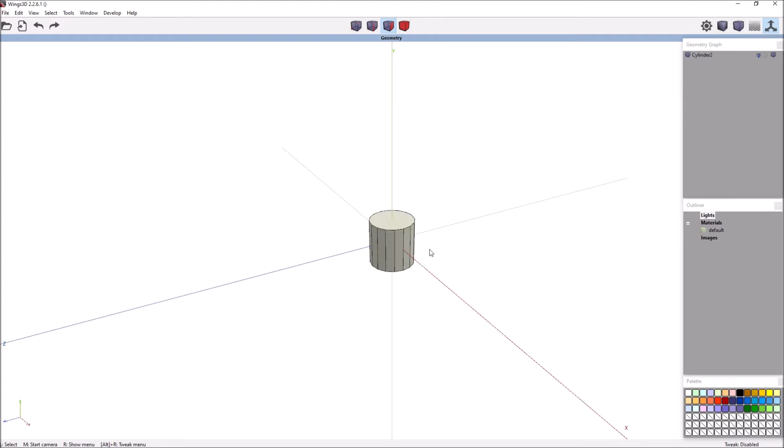Start with a nice cylinder. Let's have a look here at what we've got, and scale that down there. Let's scale the top—we're going to sort this bottom out after. I just want the initial shape to start with. So I want to come in further than that, don't I? Like so. And then I'm going to extrude that.

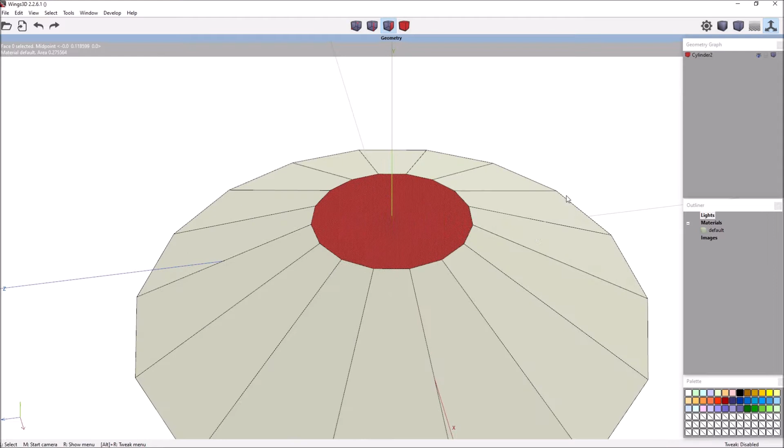Let's have another quick look at here. We've got a little bit there—that will do for the little lip, I think. Maybe a bit more. And then I'm going to inset a little bit, and we're going to extrude, because if I remember rightly just then...

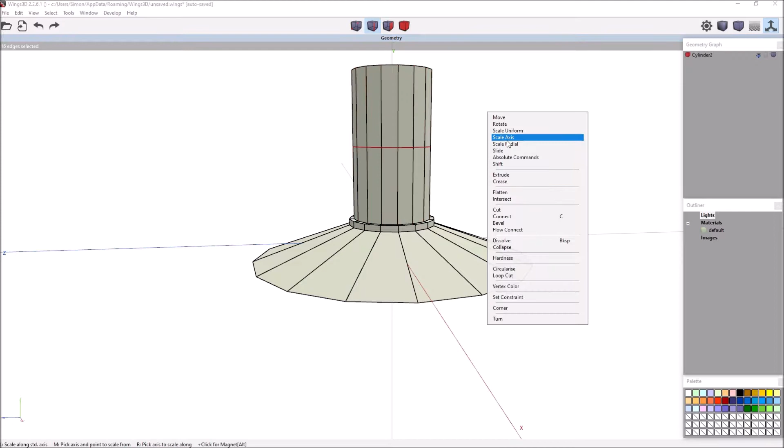Yep, we have the hourglass figure here with a ring around the middle, so let's get this ring around the middle done. At this point I don't really worry about the sizes etc, of course I can always tweak them later. Like for instance these—I will just drag this in a little bit to get the hourglass.

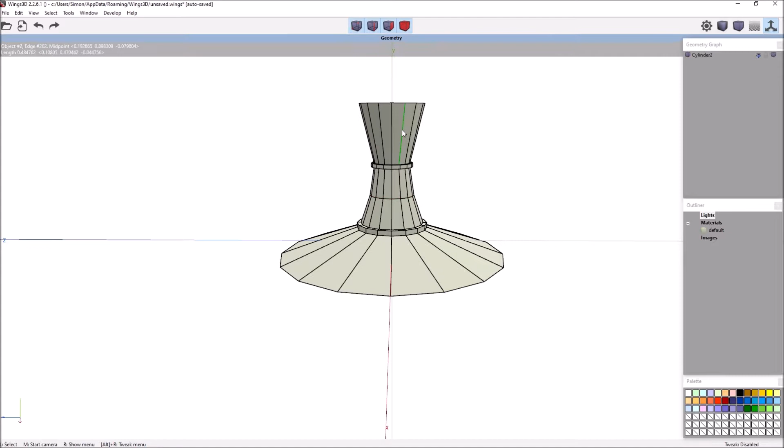Let's say we're going to work on the low poly model here. Have a quick look at what it's going to look like—that's not too bad. And let's see what we've got next. That looks to me like there's another little lip on there, another ring or whatever you want to call it, going around there. So I'm going to just extrude that little bit there.

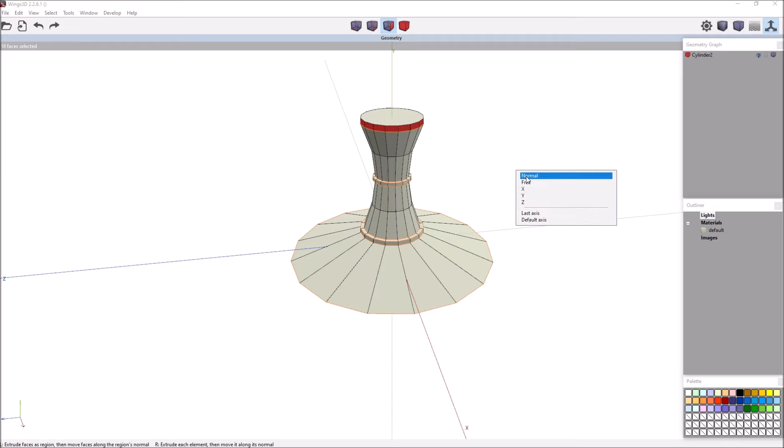And the top, now we've got this massive bit here. So I'm going to extrude here to make this massive bit. And then we go across the middle and we've got to make that into some kind of circular shape. But the bottom is taller than the top, so I'm going to go up a bit with that. That's our central ring.

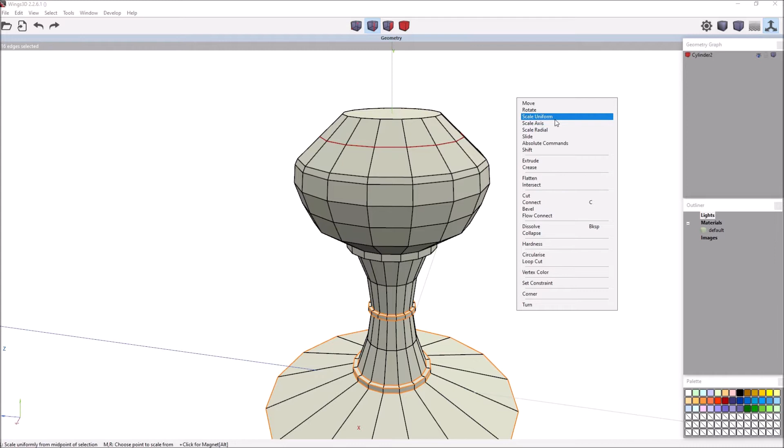And then I'm going to get this out a bit, get some sort of shape on here. Yeah, it's not too bad. I'll put another ring in there because that'll matter after. And this bit, what I'm going to do is extrude there after I've beveled it a little bit, but not yet. That's actually quite a nice shape—I quite like that shape to start with, so I might keep that shape, or something similar to that shape.

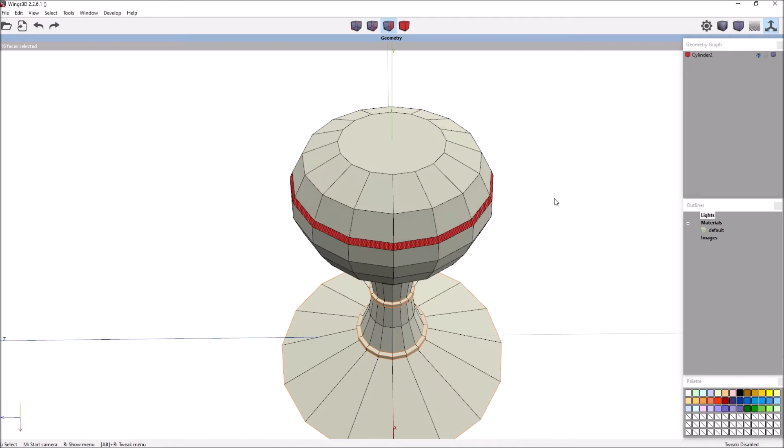These—oops. These I'm going to extrude, but I want to do something different here, so not that. We've got an odd shape here, which I don't particularly want—I shouldn't have done that yet. Let's flatten that Y. Flatten this one Y as well.

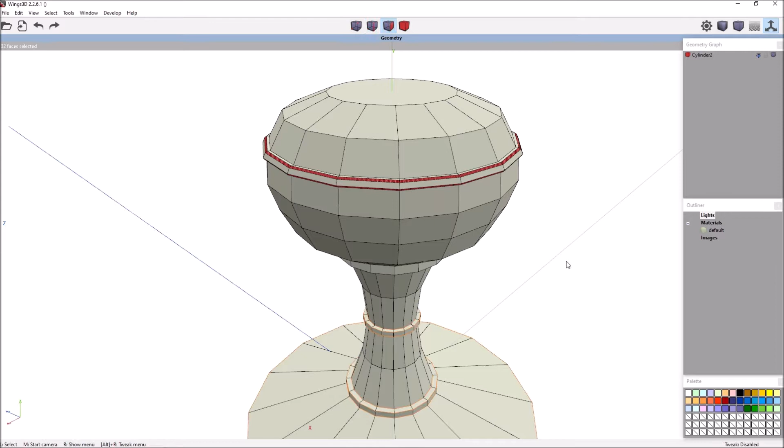This is quite a good happening because now it'll show you extra commands. I completely messed this up, but at the end of the day I don't think it's going to be that bad. It won't matter because we're inventing the shape anyway and the style of this, so it's not going to really matter.

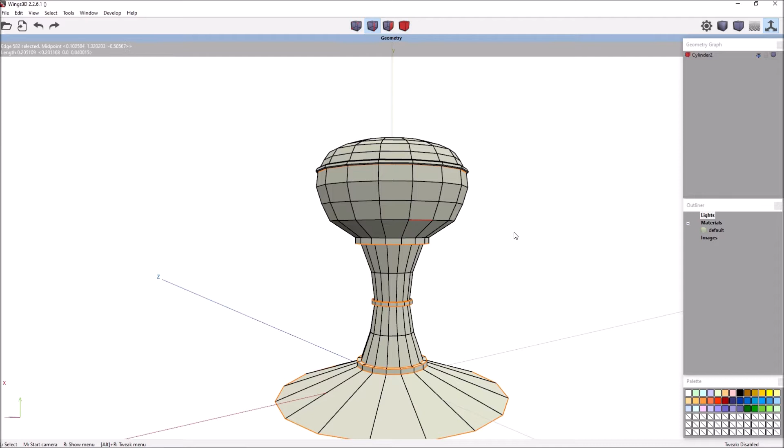Let's just take this out a little bit more—it's a bit more of a bally shape. We'll come in a bit there. Yeah, quite like that shape. Right, okay, that shape's quite nice. Let's have a look what it's going to look like. Reasonable. Let's have to one subdivide.

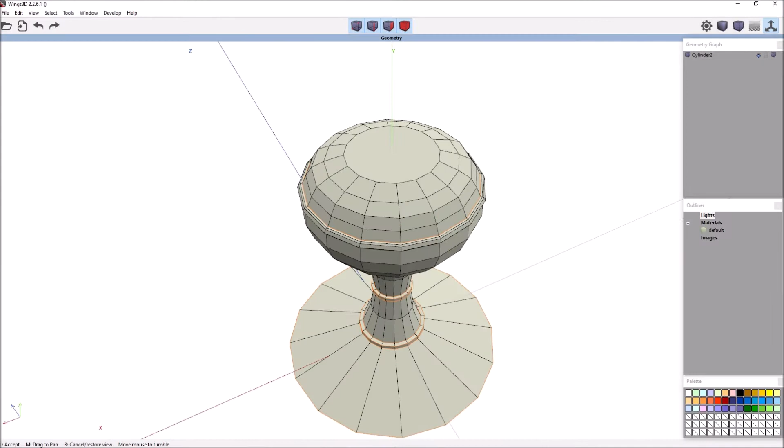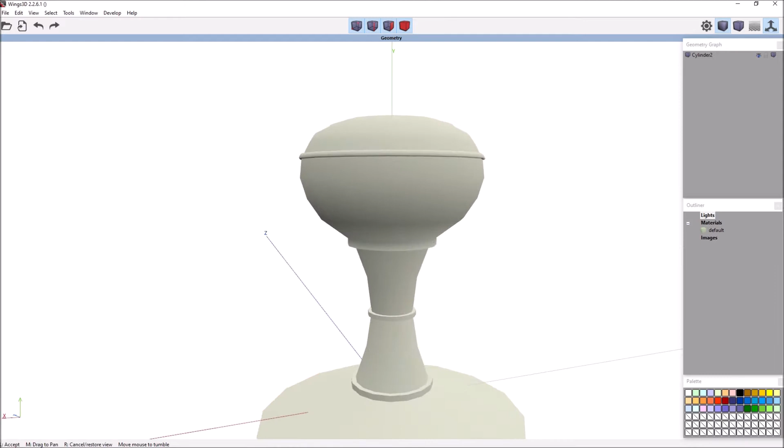Oh, it's a little thing there. Probably around about there, I can't make my mind up when that goes in. Well, I think the top comes out rather than that going in, so I'm going to take out the top a little bit. That looks like it's scaled down somewhat, so we're not going to see it there, but we will have to, especially when it's painted.

Oops, wrong thing. We want to come in, we've got a little ring around there, so let's drag this all the way in. A bit more, cut a little bit, and I'm going to give this a bevel. Actually, no, let's not.

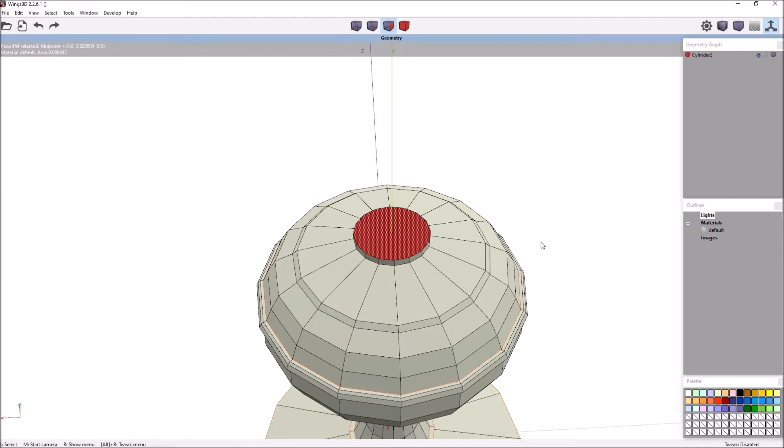Let's go to there, it should be this little tiny ring here. Now we've got this odd shape going on here, so we're just going to go up to here-ish, I think. Yeah, possibly. No, change my mind again.

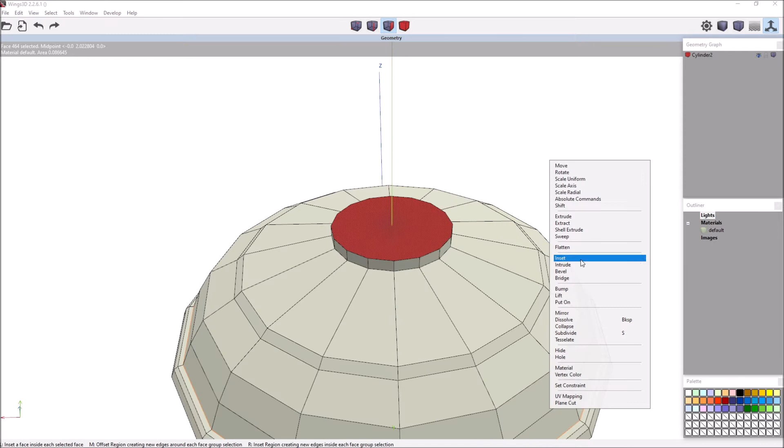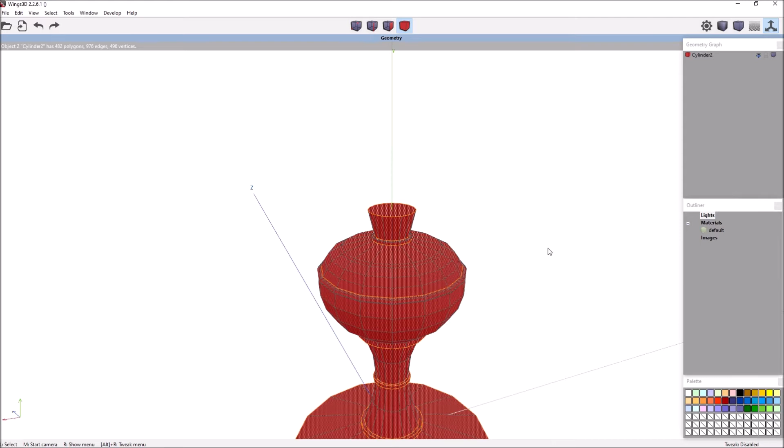Now I'm going to go to here and get this odd shape we've got going. That's the size, not too bad. This, because we want a ring, I'm going to bevel it, so the hard edges don't affect it. Let's have a look. That's not too bad.

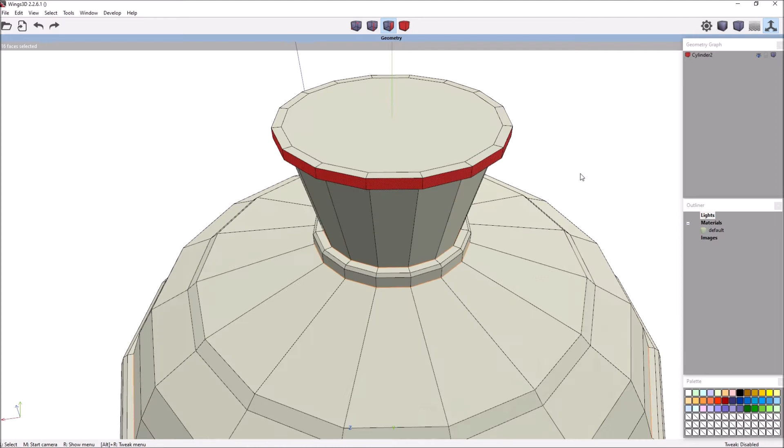Now, what have we got on here? We have another ring going on the top here, so we're going to extrude that. Extrude this, and because it's a ring, again, we're not going to want the hard edges, so I'm going to bevel them, and that should give us that ring effect after subdivision.

Made a nice mess of the topology. And we're going to go up a tiny bit here on the inside, again, which we've already got. Too much. There's another little ring here, tiny, thin one this time. And then we have this pattern bit.

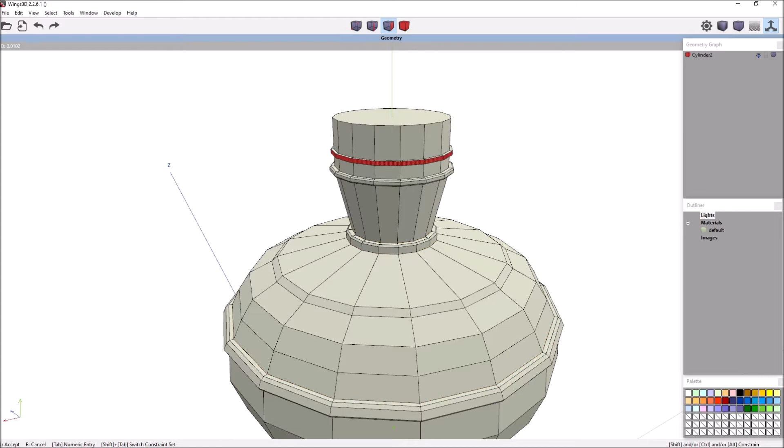That's supposed to see through, so we'll deal with that in a minute, when I've thought about how to deal with it. Let's do another bevel on here. Not too much of a bevel, because we want that ring. We've got the ring for that, okay.

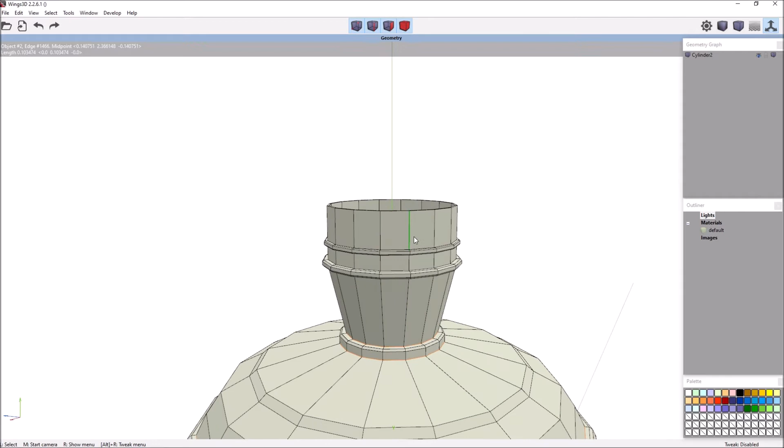Top, how are we going to deal with this? Well, I'm going to come in and extrude normal down. And then, I'm not going to do that pattern because it would just take forever. So we are going to give it some kind of pattern.

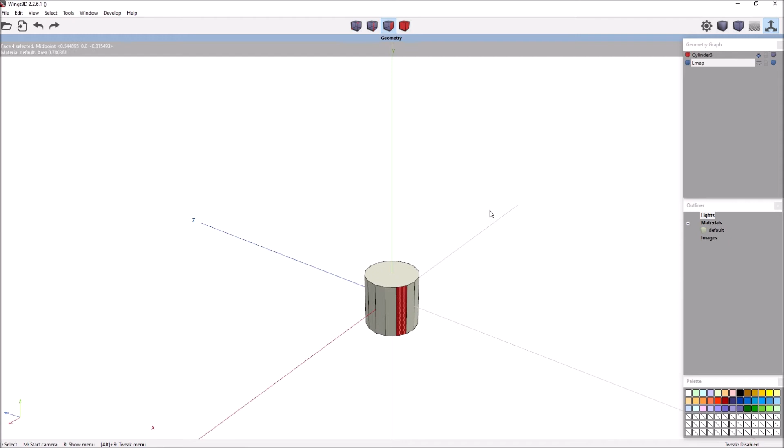So let's just call this lamp, or lamp - it's now French. And I'm going to get this a cylinder, whack it down as such and rotate it. Doesn't really matter at this point where. Put my lamp back on.

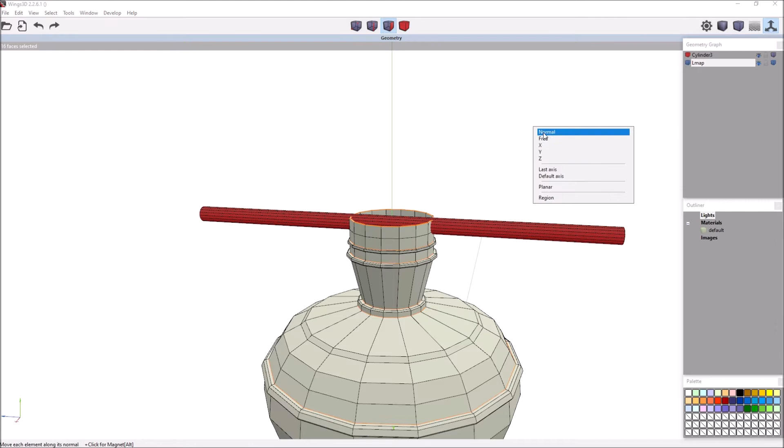Let's see how much. Let's just move that down a lot more, so it's in the middle there-ish. Let's get that, not too bad. Well, not too bad if you're in my mind and you know exactly what I'm thinking. Right, now move this over here somewhere.

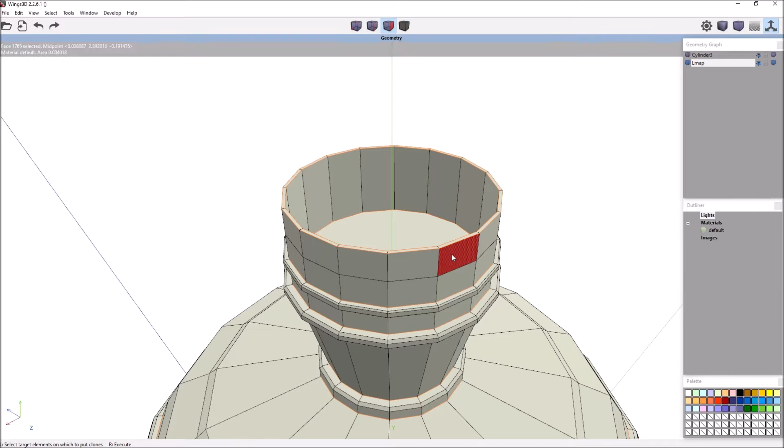I'm going to use the put-on command now on multiple faces, so I'll right click, put on, and then I'm going to just highlight all these. This is going to take a minute or two, I think. And then I'm going to right click, and there we go, put on. And this might look cool actually, yeah.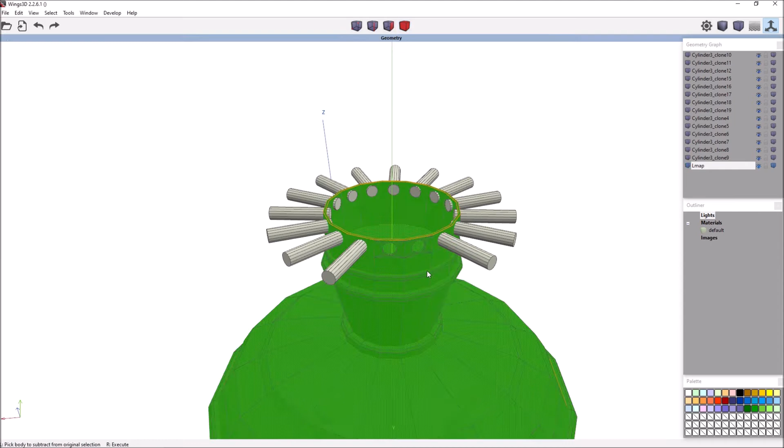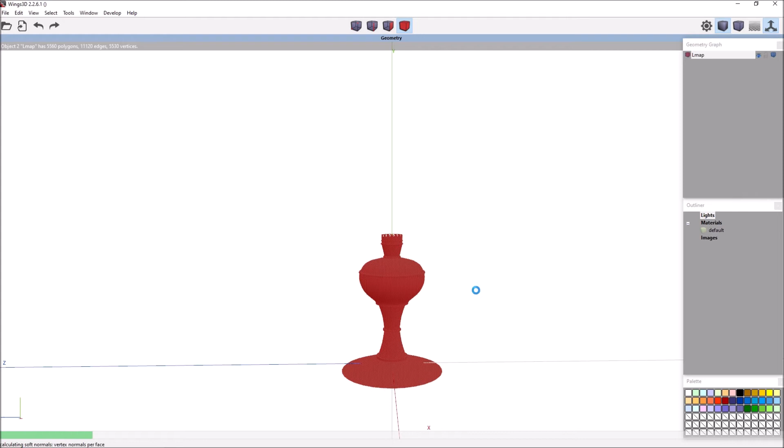Boolean difference, and I should put a hole through there. So I'm going to do that, repeat that all the way around, which makes me think I should have put it on a shortcut key, but I didn't. There, now quick smooth on there. See what we've got. Yep, not too shabby.

Okay, as we'd say in England, no wrong with that. Now, we can't see what's inside here, so I'm going to guess, because I think I know.

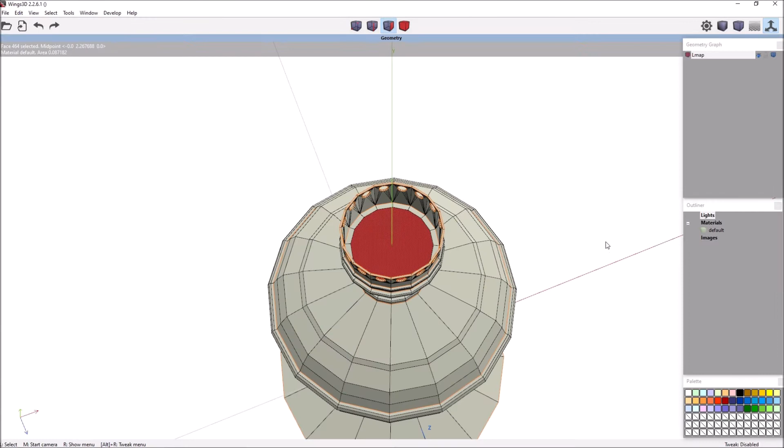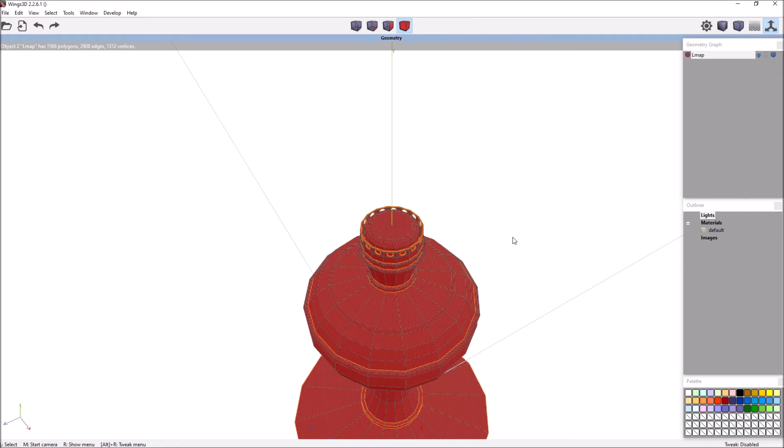So I'm going to come here and let's have a look. Let's bevel this down a bit. Yeah, one more. And now center that, and A.

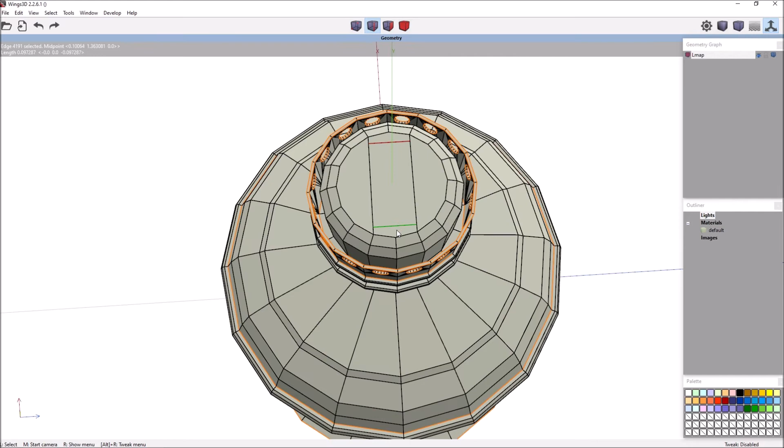Now what I'm going to do here is I need a wick, so I'm going to put a space for a wick and use bevel to come out like so. That's an easy way of doing this, but I've done it this way now. I might extrude this wick and...

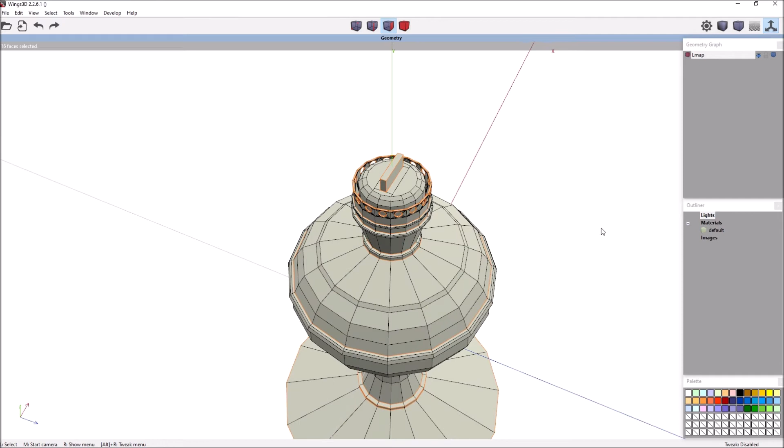That's not too bad. Now, the glass. I'm going to use bounding box. I'm saving the bounding box here at that size. Again, a sphere, cylinder, and I'm going to scale and move the bounding box. And what we should have now is somewhere that fits exactly inside there.

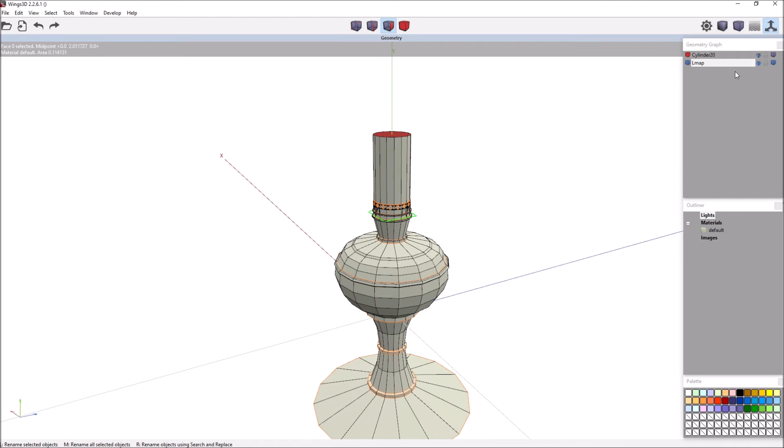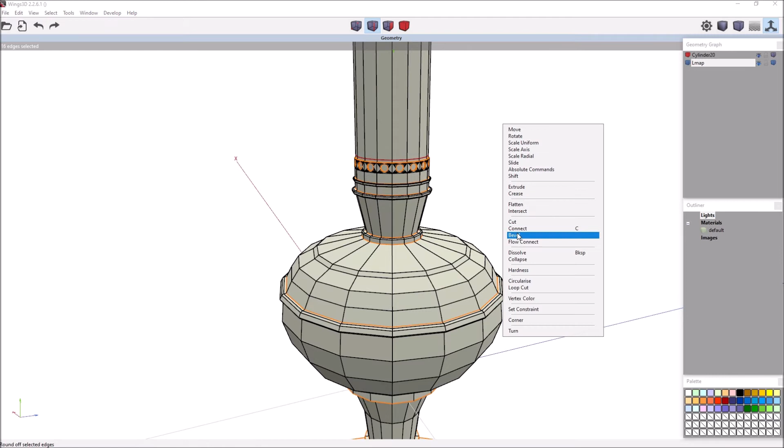Right, okay. Get rid of the lamp for a second because I want to look at the glass part. So what I want, or what I definitely don't want, is the glass to expand over the top of that. So I'm going to do that, and I'm going to give it a little bevel, which will make whatever I do above more sensible.

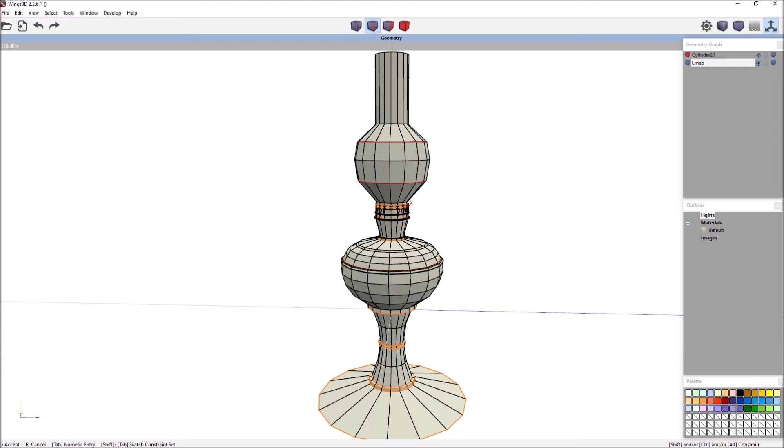The glass is about equal to the height of the lamp. Okay, but the rounded part isn't, so I'm going to have to come down with this. I pretty much do what we did with the base of the lamp, which is turn it into a circular object. Ish—it's not the best circular object I've ever made.

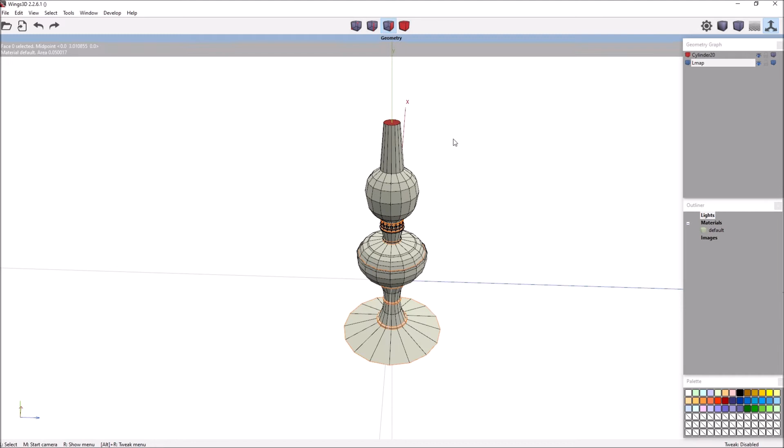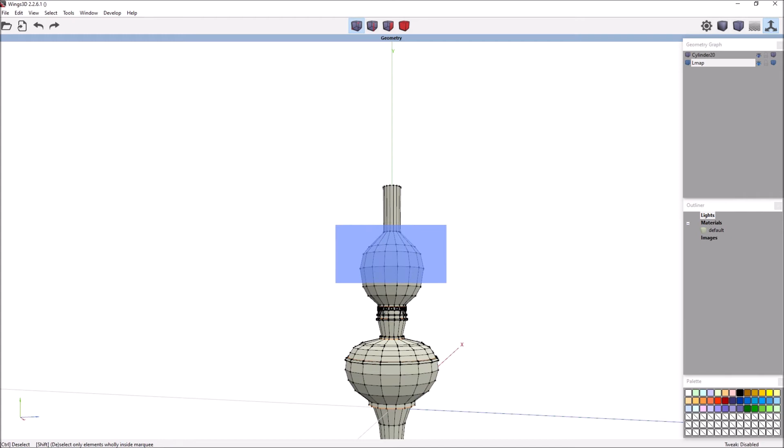Excuse me. This to me looks like it should be a lot smaller. I'm not going to worry about all these things being exact for now. Let's just pop that up there. See, that's quite big. So what I'm going to do is just make sure I've got everything.

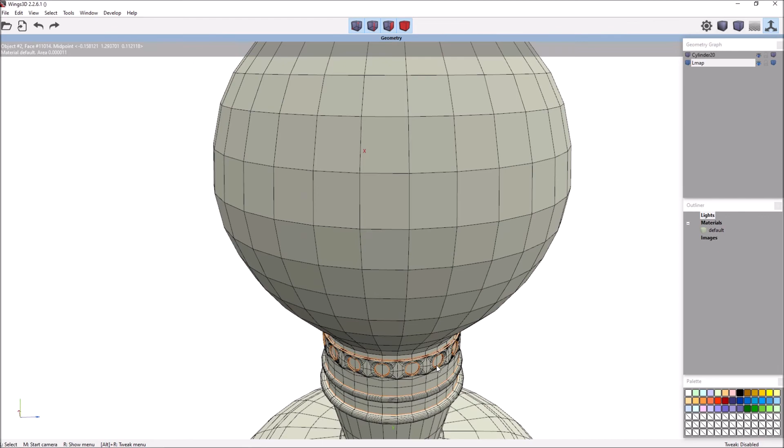Right, I'm going to drop that down. It's not that ugly. Let's give that a bit of a shape and make sure we haven't gone over the edges here, which we haven't—so nicely done. As you can see, I probably need another loop in there.

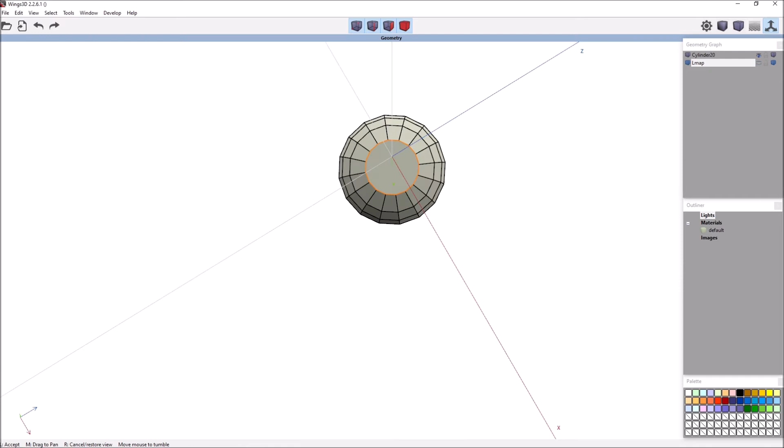Going to extrude. That will give me an interior and exterior for that lamp. And then we'll do that.

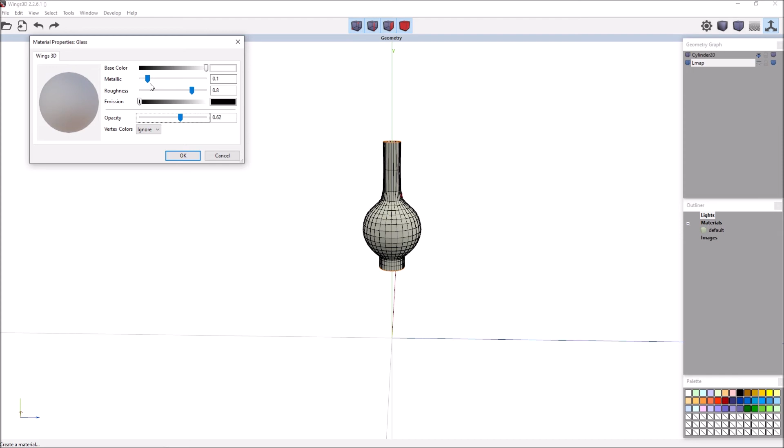Now the problem we're going to have here is when I set this to give it an opacity, we're going to have little marks, I should imagine, somewhere. I'm going to attach this to this material, assign to selection, and we have a see-through lamp.

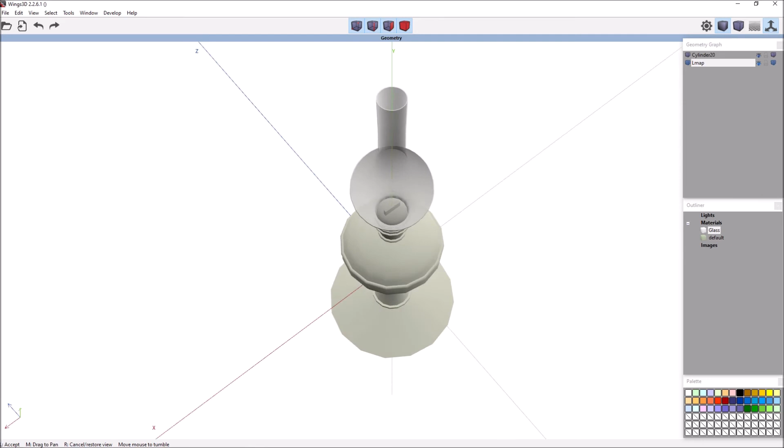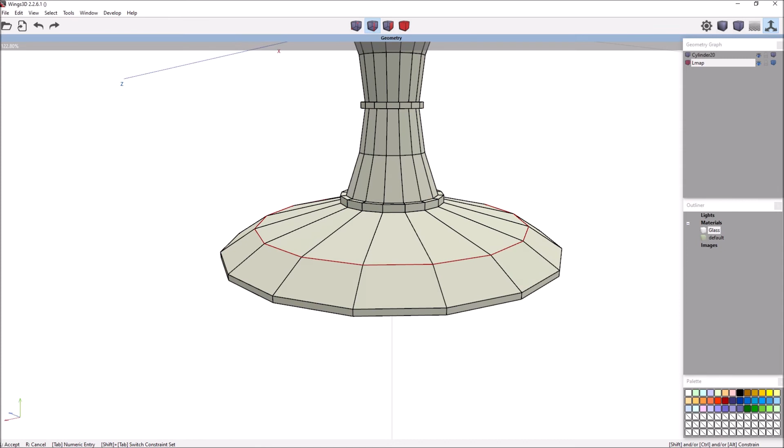Now that just needs a little work on this base, I think. Maybe a bit thicker. There's also that little ring that goes around it. Could have used slide here, but I haven't done.

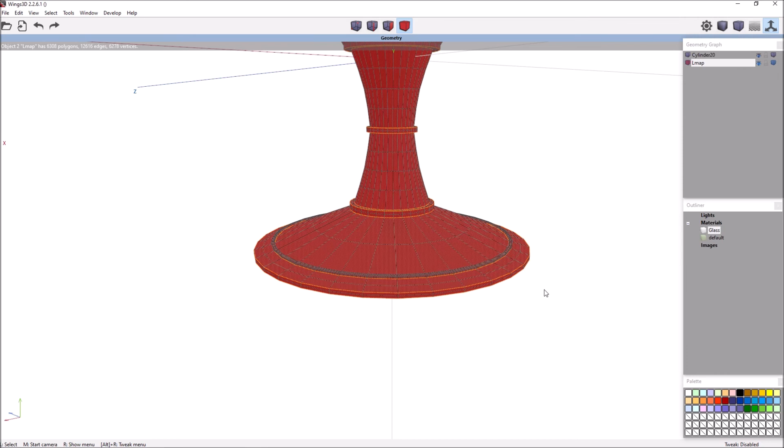So I'm going to bevel this, and I'm going to give it a bit of a lift there and there. So I'm going to put a ring on here. It isn't on the original, but I like the idea, so I'm doing it. Yep, that's not too bad.

So a quick look at the original. Well, it's a lamp.

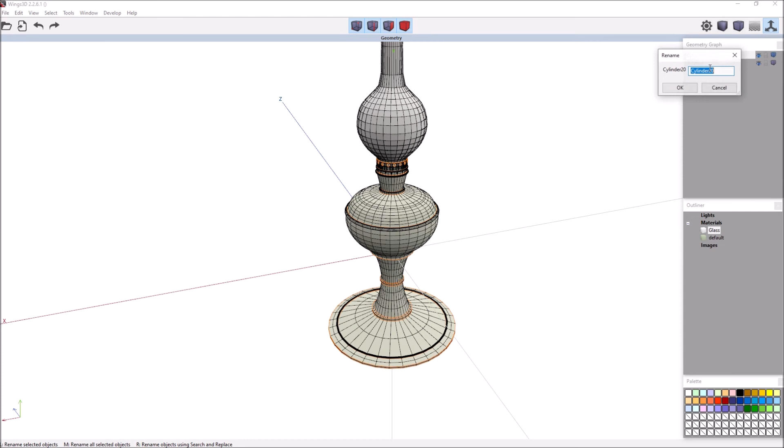What we need now is, I'm going to hide the glass and the lamp, because there's something missing off that Google picture, and that is the little wheel that makes the wick go up and down.

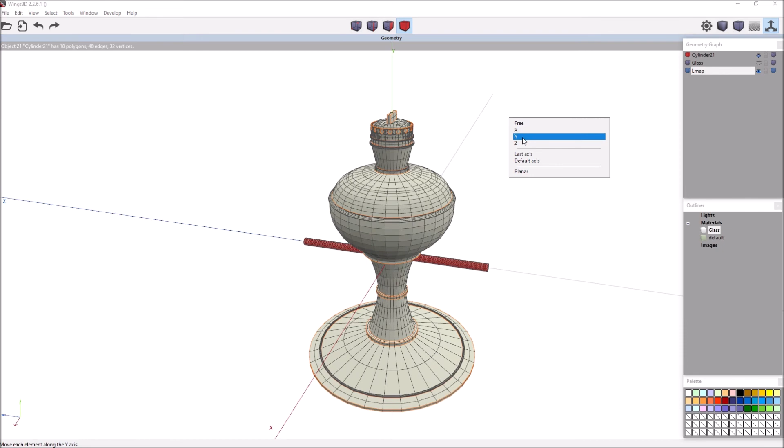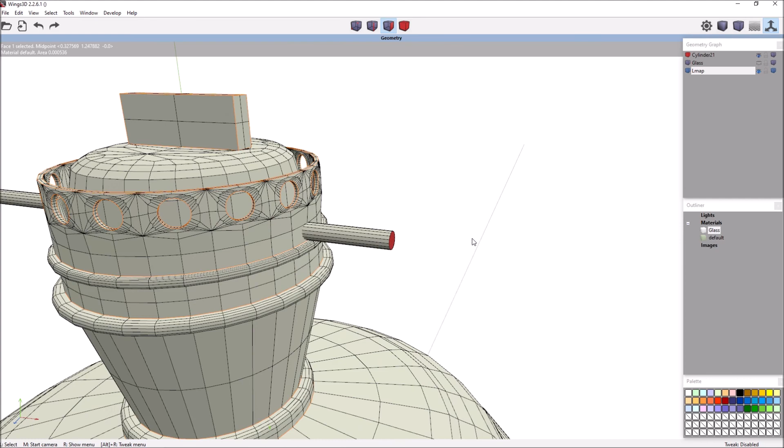Now I'm going to rotate this. Let's get this so it's about the right size—a bit wheelie, isn't it? Just throw that in there. My extrude here. Oops, see that? Have a look on here when I press I.

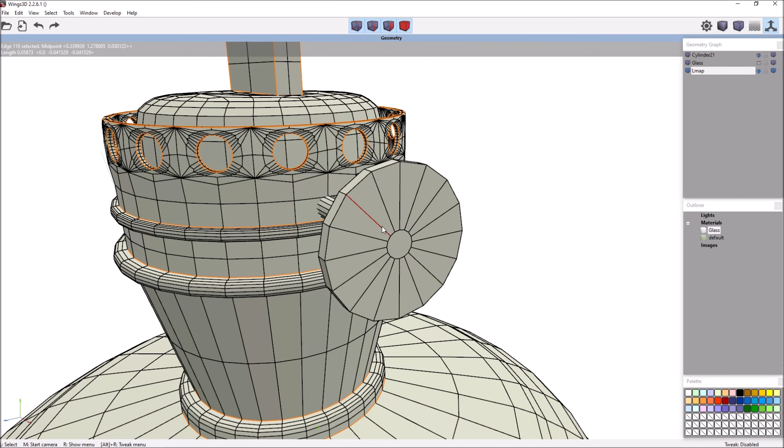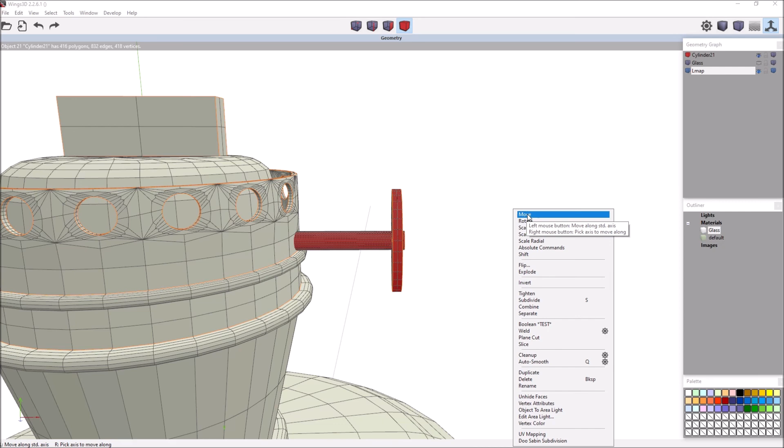So therefore in this case I can't use I. So I'm going to just select them all, highlight them. That will do. I should imagine this is going to be a little nil thing. And then I'm going to get this and pop it in here somewhere. Get our wheel, Q it, S it,

And put that where I want it, which is going to be there. Ish, I think. Maybe a bit more in. There. And then we have our little wheel, our glass.

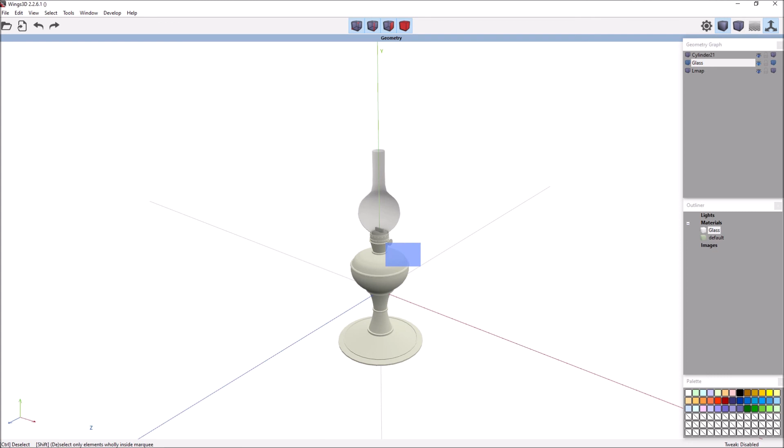Let's stick them in the same part. Give it another subdivision, and there is a weird lamp. I quite like, to be honest. Well, the base looks a bit big.